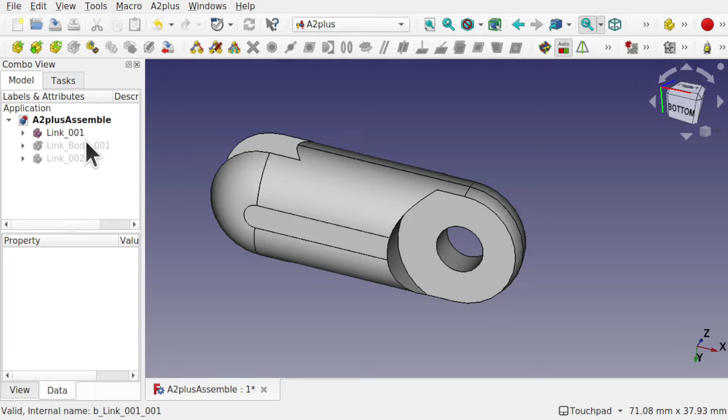In this tutorial we're going to be looking at the A2Plus workbench and the subject of printing in place, where we print an object that has connections but print it as one single object. For instance, we're going to take this simple link, model it, and attach it in the A2Plus workbench to a number of other links so they connect together through a hole and shaft. We can then simulate that in the A2Plus workbench to see the movement, and then print this on a 3D printer after slicing it to produce a movable part with that rod and hole. This will be the first video looking at the A2Plus workbench, and we'll go deeper to understand more about the constraints and the way objects link up.

So I hope you're enjoying these videos, and let's have a look at this workflow.

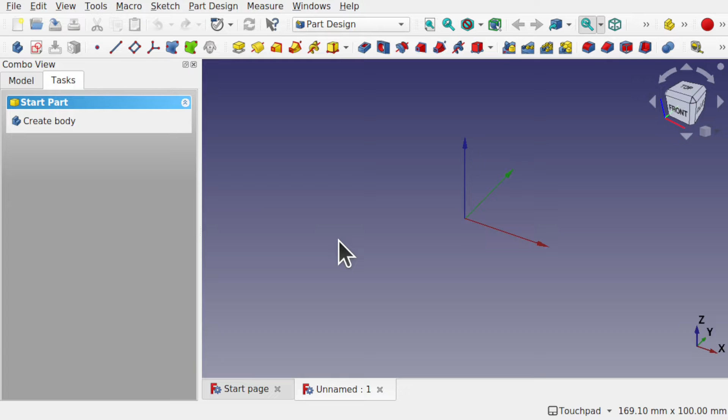I'm going to start by creating a new document, and in this tutorial we're going to be using Part Design. We can use Part if we want to, and what I'm going to do is create a simple link object. This object will connect with itself to make a chain of repeating objects that we can use to print in place with the A2Plus workbench. It's up to you what we create, but this is for demonstration purposes.

So I'm going to create a body and then create a sketch. We're going to go along the XY plane and hit OK. So this is going to be a very basic object.

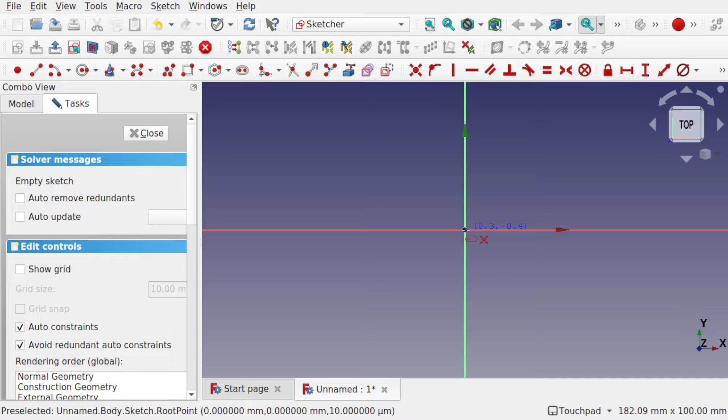I'm looking down on our scene and I'm going to create a slot. Just using the slot tool, I'm going to constrain to the center. You can see I've got auto constraints on. Then we can come up and place it connected to this line. I've got some redundant constraints because I've added it to that line, and also I had a horizontal constraint there which wasn't needed, so it's made it redundant.

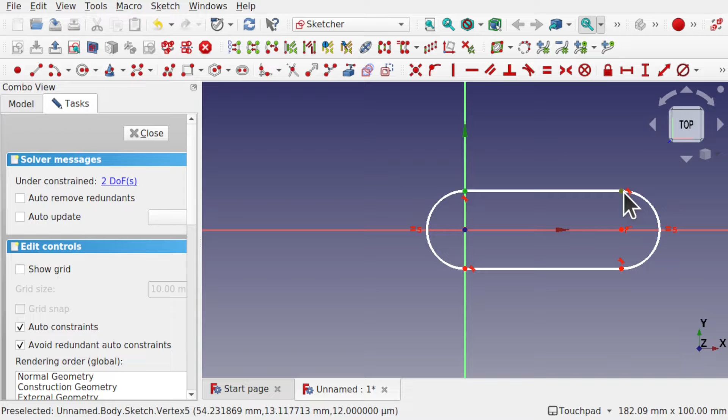Let's add some constraints in here. So I'm going to take these two points and make this 25 millimeters. Also going to add a diameter constraint to this arc, set this to 15 mil.

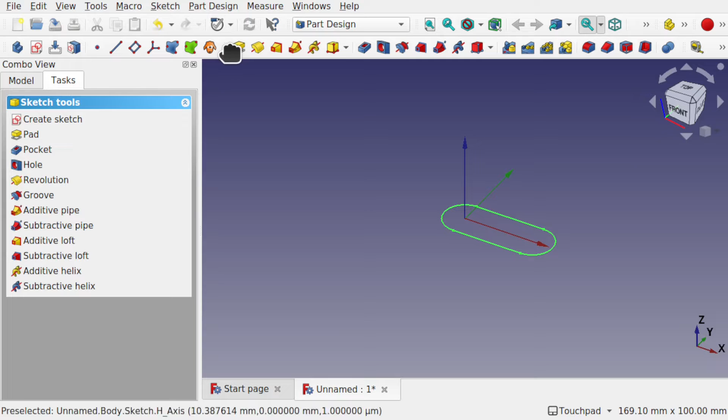Once we've got our shape, we can close and extrude this. In Part Design, it's known as a pad. So make sure the sketch is selected - you can see it selected over here - and we'll pad this. I'm going to pad this by 12 millimeters and also make the pad symmetrical to plane.

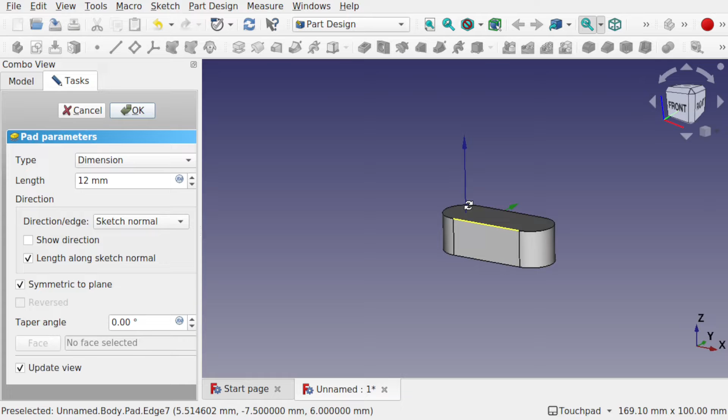This means if we turn the gridding on, you'll see this will be slicing through that plane. You can see we've got the axis cross on, and that's available from View, Toggle Axis Cross, and you can see that's in the middle of that axis cross. This just makes it a bit easier when I take a section out of here to make a slot, allowing these to be linked together.

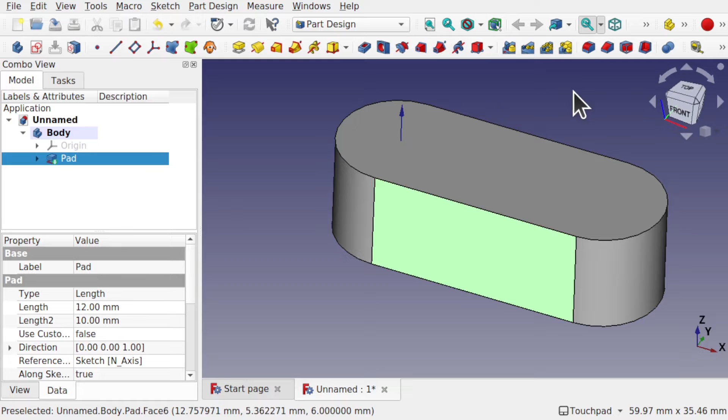Now, against best practices, I am actually going to fillet this straight away. The reason being is because I want the shape, and I know the fillet's not going to affect anything else. I'm going to click on this face and then create the fillet.

I'm going to set this fillet, pressing the up arrow on the radius, so it's just on the margin of error. At the moment 5mm - if I go one more, it goes into error, and you can see we've gone back to the normal pad. Let's bring this back down and set this to something like 5.99.

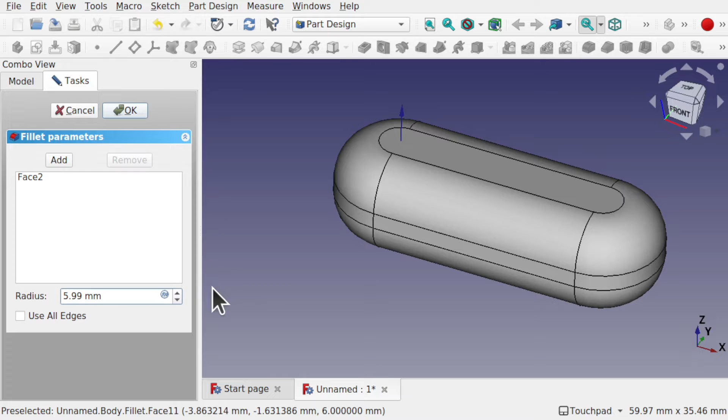That's allowed to take, hit OK. You can see that fillet has taken all the way around, because filleting this face will only succeed if all the other faces going around were filleted. So we've got this lozenge type shape here. If you wanted to, we could do this with something like a primitive object, like an ellipsoid or an oval, but I'm just going to use fillets for the time being because it's easier.

We haven't touched on primitive objects in our course as of yet. Let's create a sketch. This sketch is going to section through here, and we'll pocket this to make space.

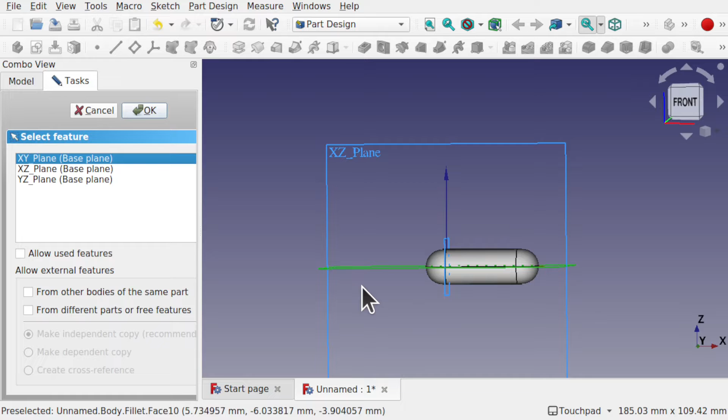Let's click on the top, make sure nothing's selected, and create a new sketch. You can go along the XY plane. If I add some angle to this, you'll see that the plane here, the XY plane, sections through the center of here. Let's hit OK.

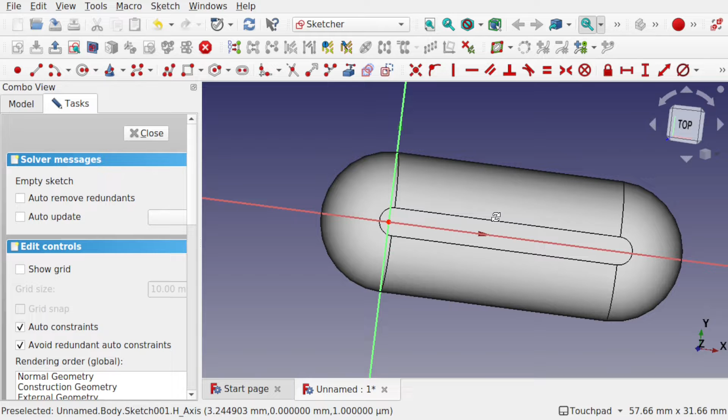We're now through the center of that object. Using the section view, or come up to Sketch, View Section, we'll cut this object in half. Use the navigation cube to make sure that we're around the right way, because if we start bringing this around, sometimes it becomes hard. If we say we're like this, it actually looks like the same as if this. We get this illusion. So always use your navigation cube to align yourself in 3D space.

Now we've got this shape. Let's create a circle in here and pocket it. Then we can create another operation on this side that will slot into this section when we repeat a number of links in our assembly.

Using the circle, make sure we auto constrain to that center point here. Got the auto constraints on. We get a coincident constraint, and we'll come out just beyond. I'm going to hit escape and click on this circle and add some dimensions. We're going to insert a diameter and set this to 16mm and hit OK. This allows us some gapping in here to allow for the connection to move freely in this space.

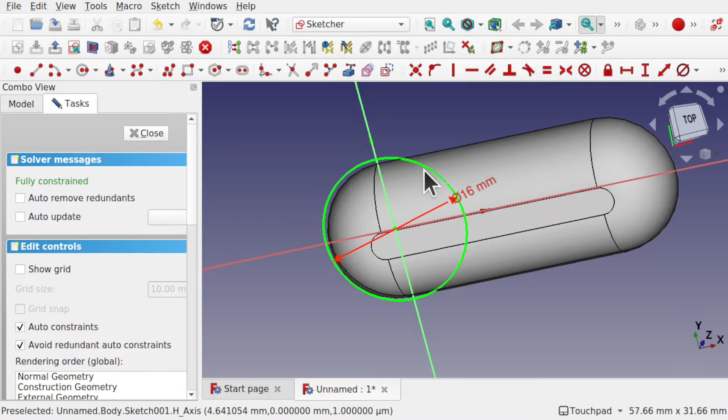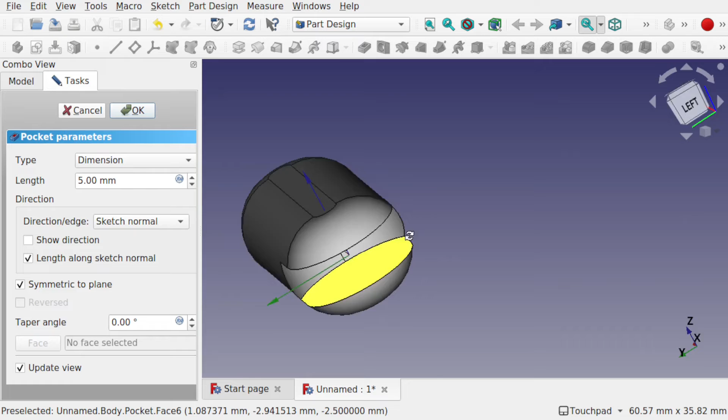Let's hit close. You can see the sketch is within there. Now we can use the pocket. This will create a pocket moving downwards. Let's make sure that the symmetrical to plane is selected, and we can see that pocket in there. And you can see the curvature we have. The length is 5mm. We can go for that. We can adjust that later and hit OK.

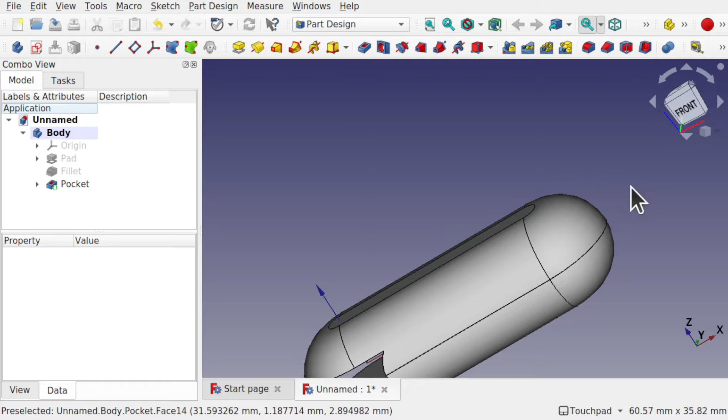Now we've got one side done. Let's do the other side. We're going to repeat this on the other side, but this time we're going to take material off this part and this part. So we get a female and male side.

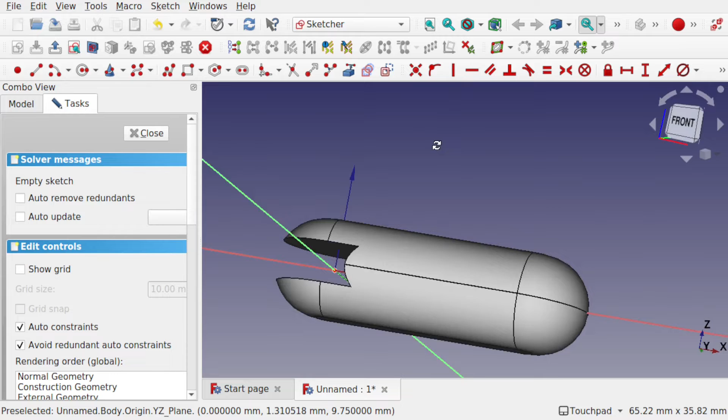Let's try that. Let's click on top, make sure nothing is selected, create a sketch. This time we're going to go along the XY plane again and hit OK. We are now positioned along that XY plane, and we can create another sketch. Use the section view. I'm going to import some geometry because we've got nothing to attach the circle to.

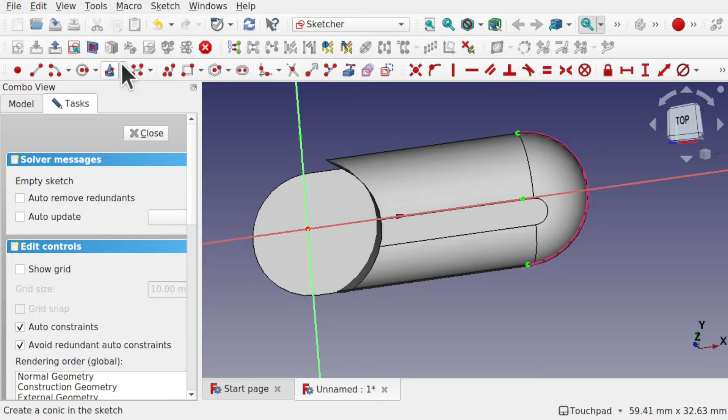So I need to take this geometry, import it, so I'll get a center point. To do that, I'm going to use this tool here, External Geometry, also available from Sketch, Sketch Geometries, External Geometry. If I highlight this edge here, you can see I can import it. Click on the edge, we get the center point. I can now use my circle and create a circle against that center point and bring this out.

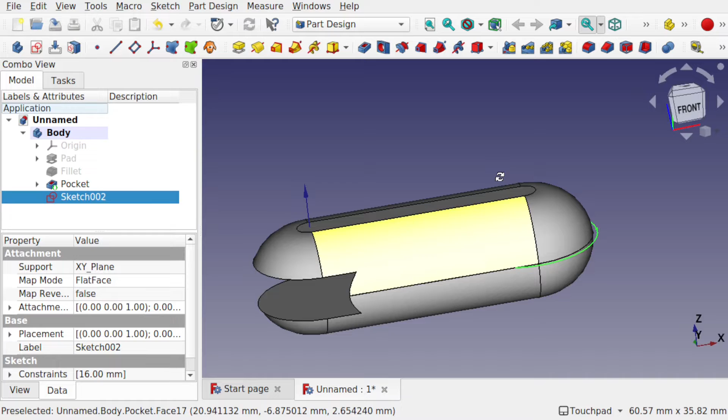Again, we're going to set this to 16mm. Click on the circle, add a diameter, and set this to 16. Hit enter. Let's hit close. We now have that sketch in there. I'm going to take that sketch and come out to edit and duplicate selection.

I'm going to uncheck the pocket, just leaving the sketch there. I'm going to uncheck the plane as well, we don't need that. And hit OK. We now got two sketches that are the same.

I'm going to move one sketch up and one sketch down. I'll click on the first sketch we created and move this up. This will be along the attachment and the position. We'll open up the position and move it along the Z axis. Now the idea is to move it so it's around about 2 millimeters away from the top here to allow for the print in place process.

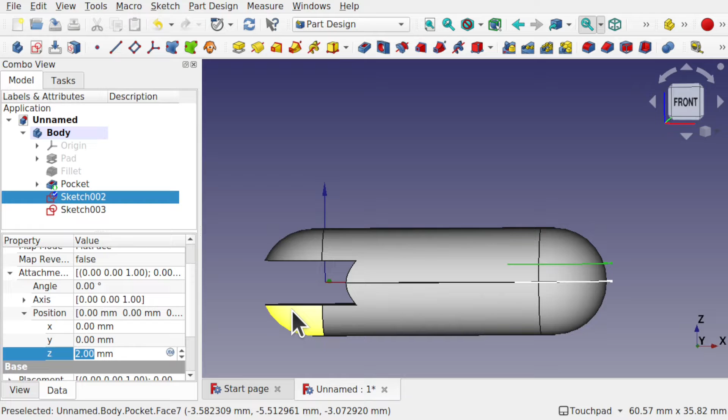You can play with the dimensions depending on the size of the extrusion nozzle you're using on the 3D printer, or to personal preference. So that's up 2 millimeters. Come into the other one, looking on the Z axis again, and we use -2 millimeters there. So we've got those two.

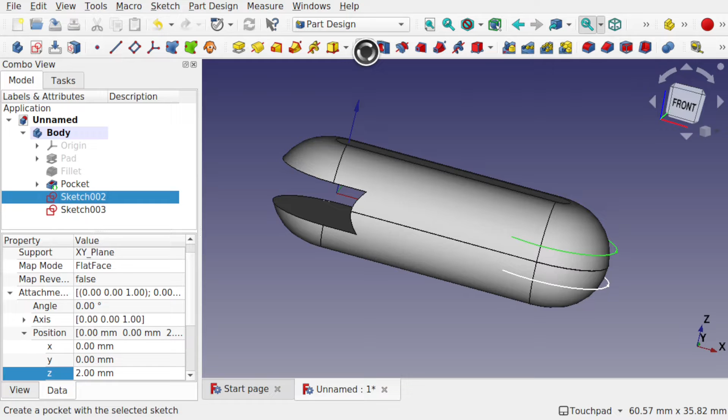We're now going to pocket these. Take our first sketch and use a pocket. Now this may go in the wrong direction, as you see here. Just click on reverse and we can set this to through all, which will go all the way through here, or to first. Yeah, okay, that's our first pocket done.

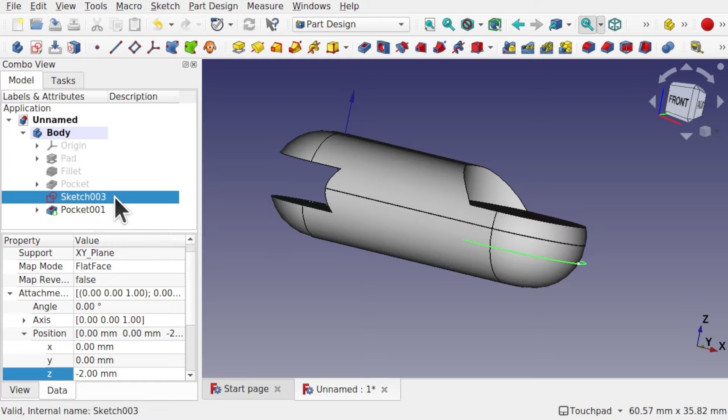Let's do the same with this one. So this sketch, let's pocket this using the pocket. This is going in the right way, so we can go through all or to first, either or, it doesn't matter. Let's hit OK.

And now we've got the starts of our model.

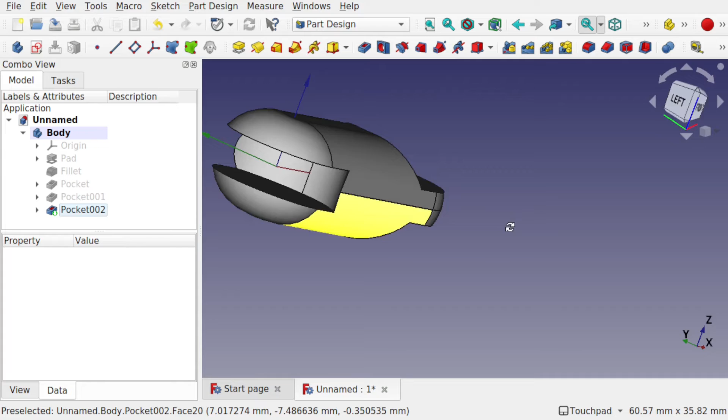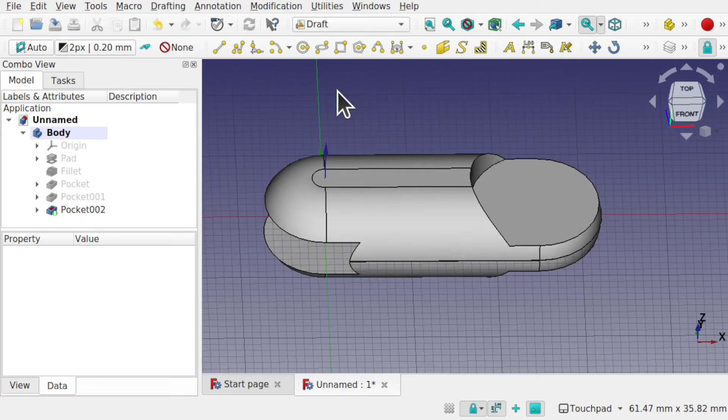I'm going to place a hole in this side. Now before we add the holes, let's get a quick overview of how this is going to join together. To do that, we're just going to mock up the assembly. So let's come into something like the draft workbench and make a clone. You can see the gridding is on and you can see how that's intersecting that plane there.

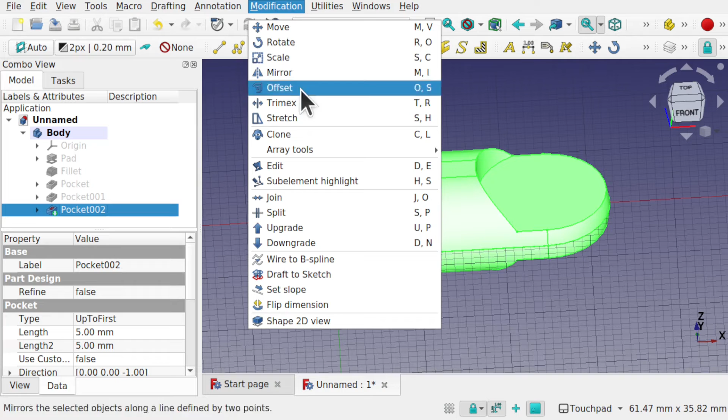Just going to make a simple clone of this, clicking on the body and using the clone. We could have done this in the part design, it doesn't matter, but one other thing we can do, rather than clicking on the body, we can click on the last action and clone that. So come up to modification and clone. This creates a simple clone of that pocket.

And you can see a clone there, which I can right click and transform, and I can move this over and get an idea of how this is going to look. So we can see how that fits in there.

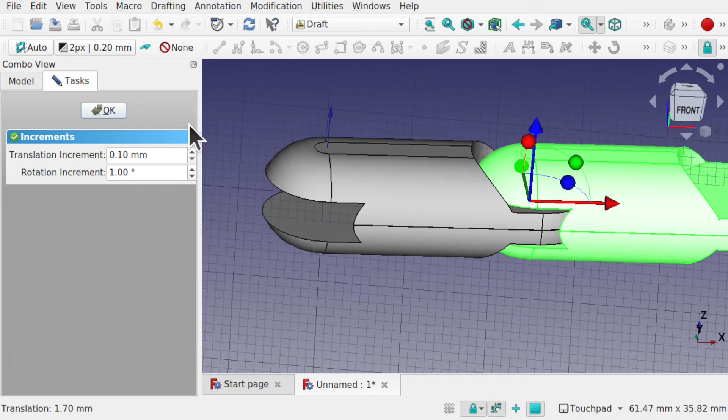Let's hit OK and add some transparency to the clone by clicking on that clone pocket, coming down to the view, moving down to the transparency and raising it up to something like 80. This allows us to see inside, so you can see how that's inside there.

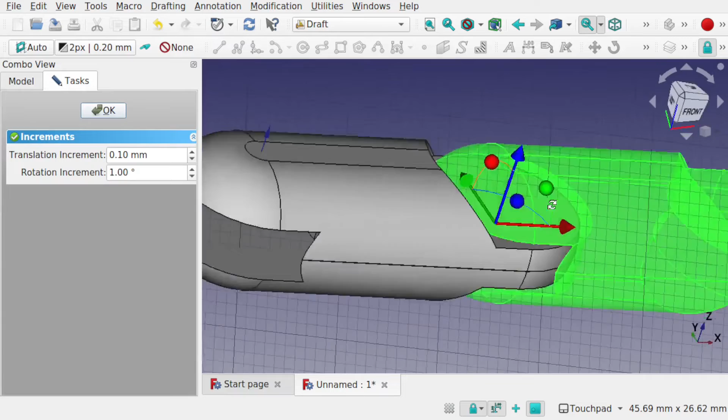You can see we've got clearance, and if I transform that a bit more, right click, transform, we can get an idea of where this has to be to allow for the hole. So we can see that sitting in there. And we just get an idea of what it's going to look like and how they're going to connect together.

Let's now create the hole. I'm going to keep the clone. I'm going to hit OK. And before I exit the draft workbench, I'm just going to turn the gridding off by this tool down here. Let's go back to the part design.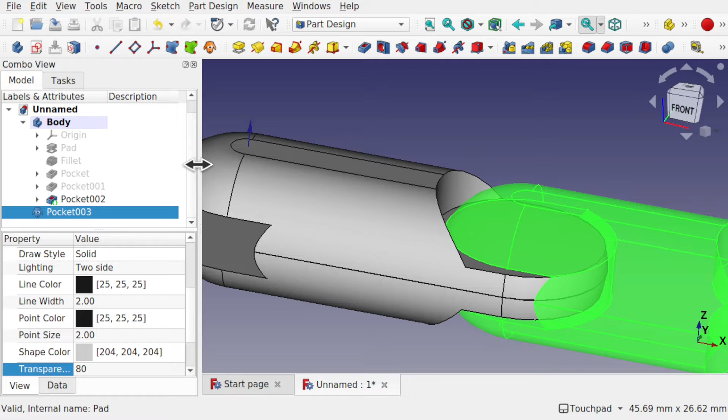Now we're back in the part design, and I can hide this clone and come in and create a sketch upon here. Let's click on this face and create a new sketch. We've attached the sketch to here.

Now we've got to pull in some geometry because I want the center point. So let's try pulling in geometry from here. You can see we've pulled in a B-spline. This is no good to us because it doesn't have the center point.

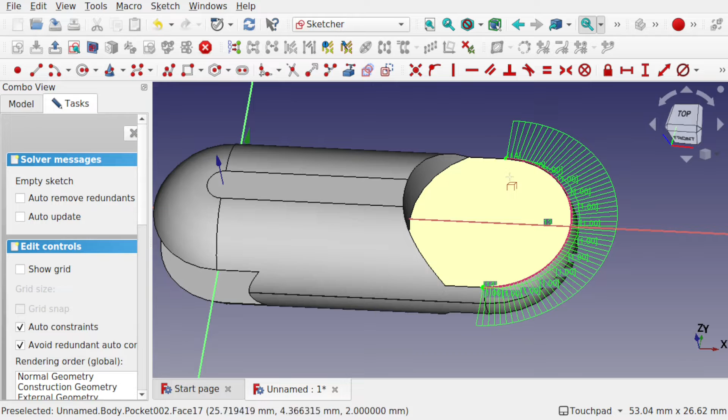To remove that, let's come over to the tasks and scroll down to find that B-spline under the elements. You can see we've got purple dots, this means it's an external reference. And we can see that by dropping down the drop down here to external, and that doesn't change. So construction, external, or all, you can see this one is external.

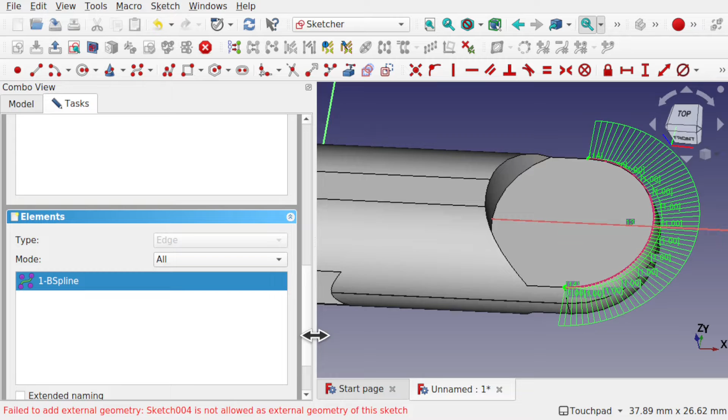Let's come over, hit escape to get the mouse pointer back, or hit the right mouse button and highlight that edge and hit the delete key. Let's remove that now. Now, one way to find that center in there from the geometry we've already placed is to use the original sketch.

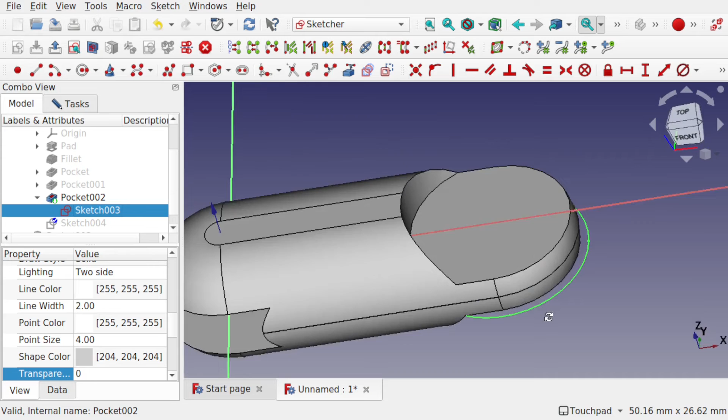So come over to the model and find that last action, which is this pocket here, and come in and find this sketch and press the space bar. We can see we got one of the circles that's built this feature, and we can use the import geometry against that circle. Let's do that and bring that in.

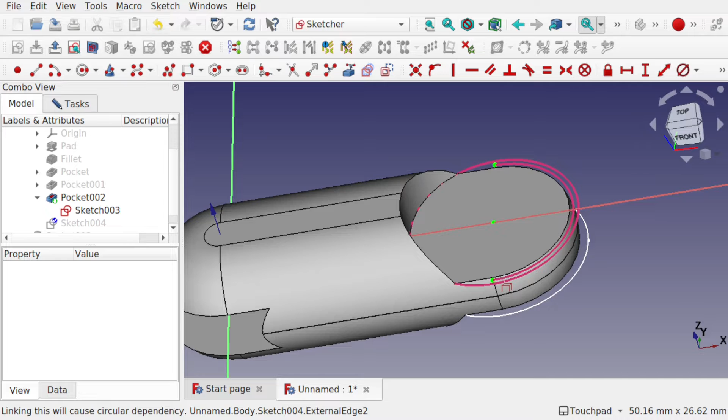We've brought in that circle. We could have also used this circle here, or brought that in as well. So we've got a choice—this edge or one of the circle sketches. We don't need both, so I'm going to go for this edge here. Let's hit delete on that circle.

Just showing you the options we have if you can't find standard geometry and you keep getting B-splines. The B-splines appear because we've removed a pocket from here and we're no longer left with a standard arc geometry that describes that pocket.

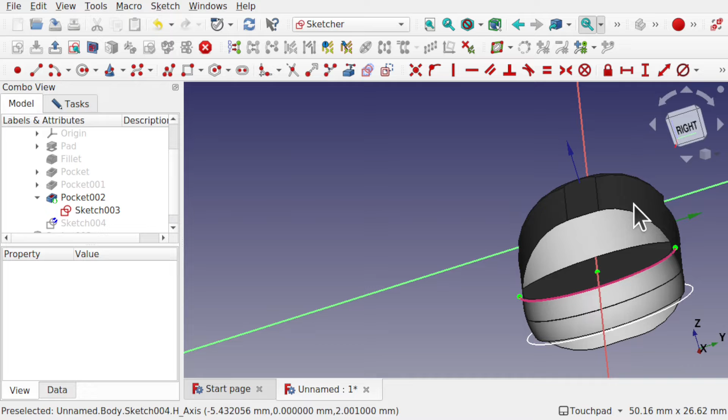This is especially common when you have curved features like this. We've filleted this and we have this curvature, because if we come around this way, we can see when we pocket, we have different widths of pocketing running down here. So this will be described as a B-spline if we pulled in the geometry.

I'm just going to hide this sketch here, clicking on that sketch and pressing the space bar, and we're going to start adding the hole. Using the create a circle tool, I'm going to add a hole in here.

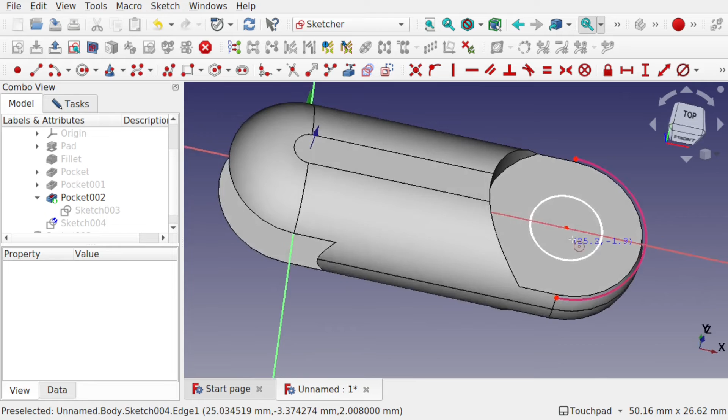I'm going to create this quite big to allow for this link to move freely in here. I'll hit escape, click on this circle, and add some diameter—I'm going to set this one to 6mm. Come over to task, scroll up, and hit close. We've got our sketch in here.

We can now click on that sketch and use the pocket. I'm going to set it to first and hit OK.

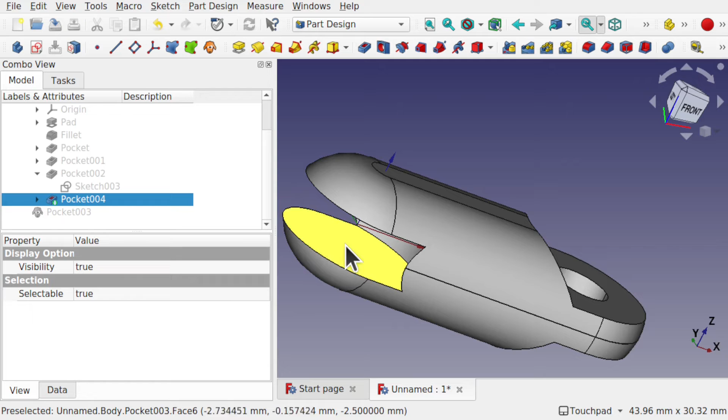We've got our hole. Now let's create a shaft that will actually go through this hole to connect up. I'm going to click on this face inside and create a sketch.

Let's use the section view. So now we're going to add the shaft that goes through the hole. We're going to use a circle and auto constrain to this center point, like so, and come out and create a circle.

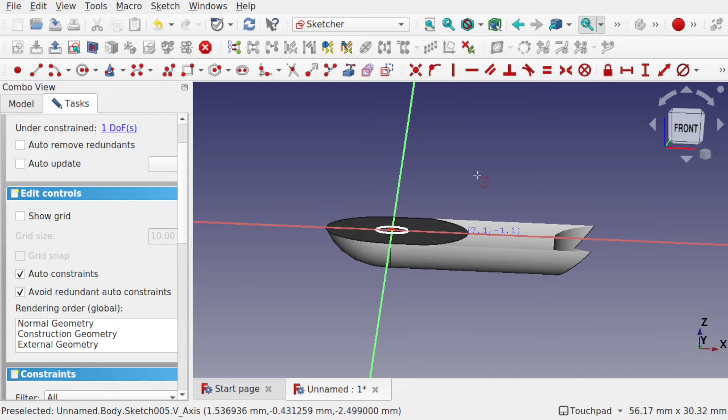Now if we look at this without the section view, we can see what's starting to happen. When the shaft goes in here and we create the assembly, they should all link together. When I pad this, we'll be able to see this in the actual draft as well—that draft clone, we'll be able to see that in there.

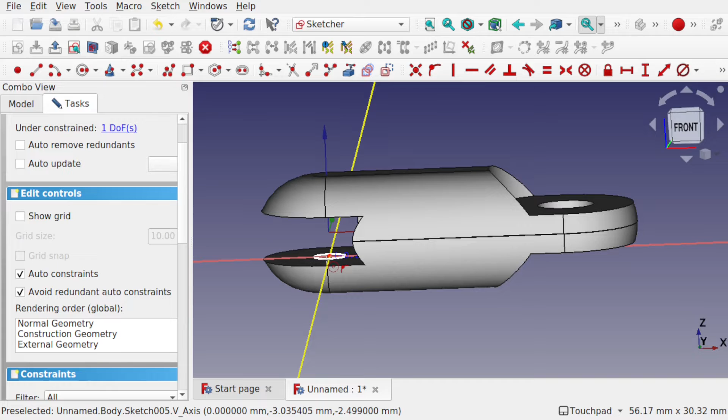That adds some dimensions, so we've got this circle here. Let's hit escape or the right mouse button to get the pointer back, click on the circle, and add a diameter. This diameter is 6, so we're going to go for something like 4, and hit OK. Let's come out and hit close.

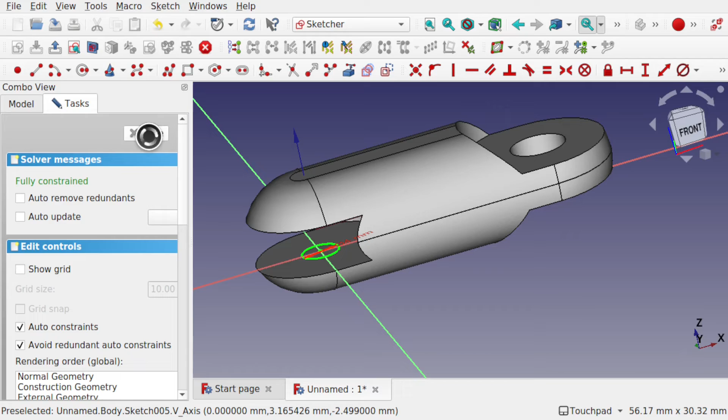We've got this circle here, and we've got the sketch selected. We need to pad, and we need to come up to the first face.

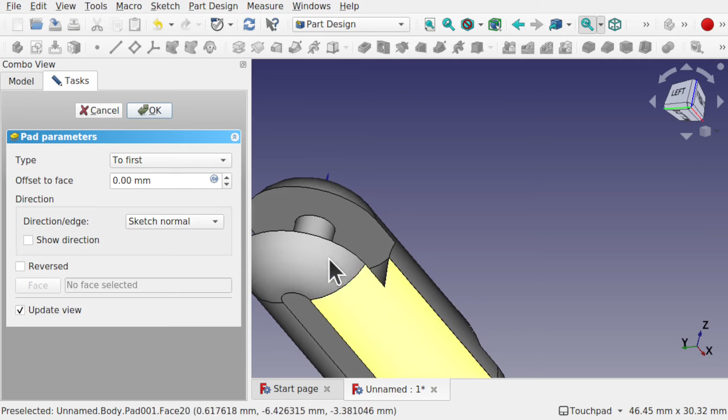At the moment it's gone all the way through, so use the type dropdown, bring this down, and click on to first. That means this is padded up to that first face there. If we hit OK, we've got our finished link.

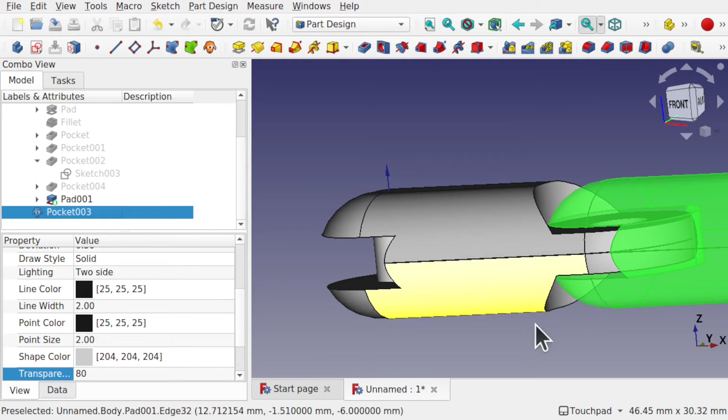Now let's have a look to see what's happened with the clone. We come down, we can see our clone is still here. If I press the space bar to make it visible, we can see what's starting to happen now. Let's click off.

So we've got our clone, which was just the clone of that pocket. Now if we cloned the body, it would have taken the clone of all of this body. So we can use a clone at different stages, or we could just clone the body as a whole.

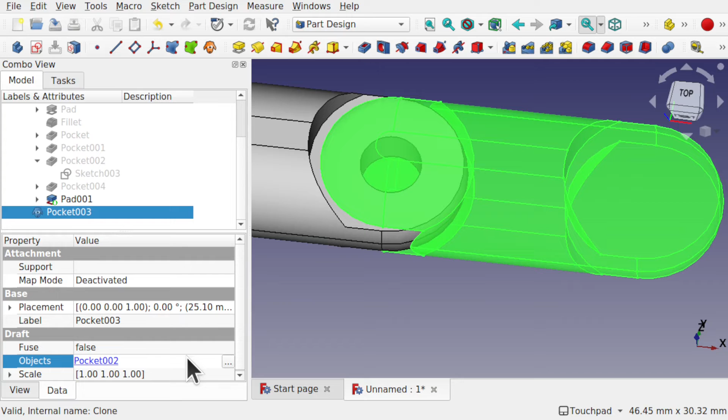Let's see if we can change that clone. Let's come down and have a look at that cloned pocket, and use the data. If we come down, we can see the draft and the objects—we've got pocket 002. We can change this by clicking on that field, clicking the button, hitting clear, and then selecting whatever we want from the list. I could select the body, or the last action, denoted by the little green arrow as the tip.

So we can select that pad from here, or select the pad from the list, and hit OK. If I click off, everything recomputes, and you can see that our hole has now got the rod going through it, and everything looks okay. We can now use this in assembly.

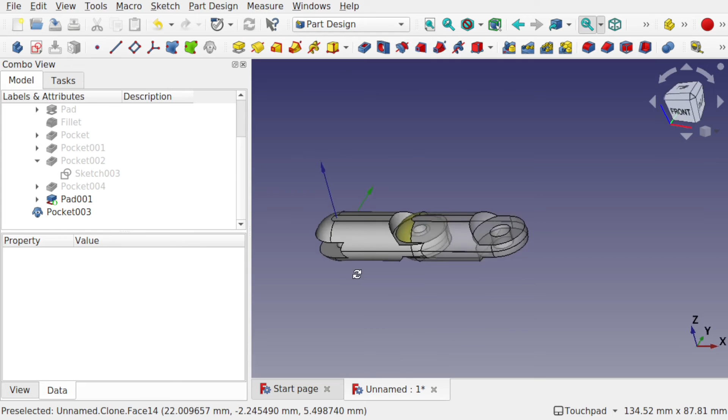I'm going to get rid of this pocket, this cloned pocket, and hit delete. So I don't need that now.

I'm going to hit File and Save As, and create a new folder. In here, I'm going to name this just as A2Plus demo. I'm going to save everything into this folder. Let's open up the folder and save this, say as something like link. Hit save. That's our first model created.

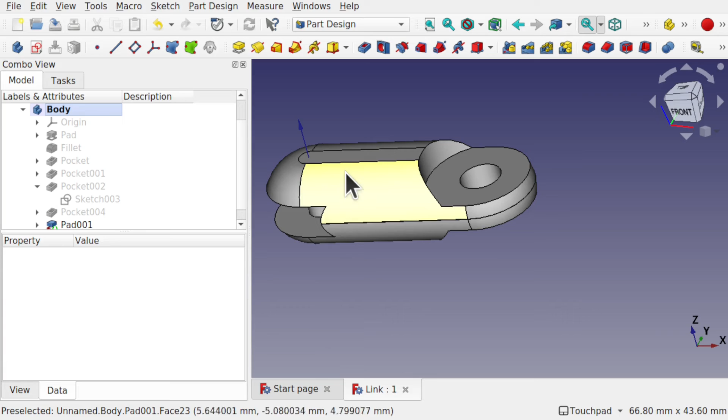So we're going to use repeats of this model in our assembly. So let's start with the assembly. So now we're going to create the assembly.

I'm going to close that link and start a new document. And straight away I'm going to save it. So File, Save As, and we're inside that A2Plus demo. And I'm just going to call it something like A2Plus Assemble. So now we've got our document ready to go.

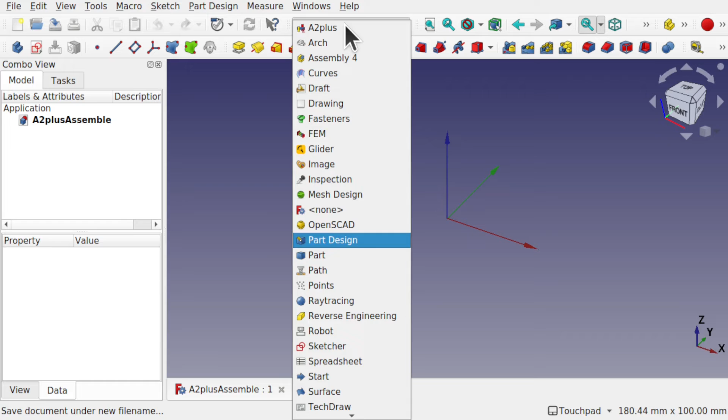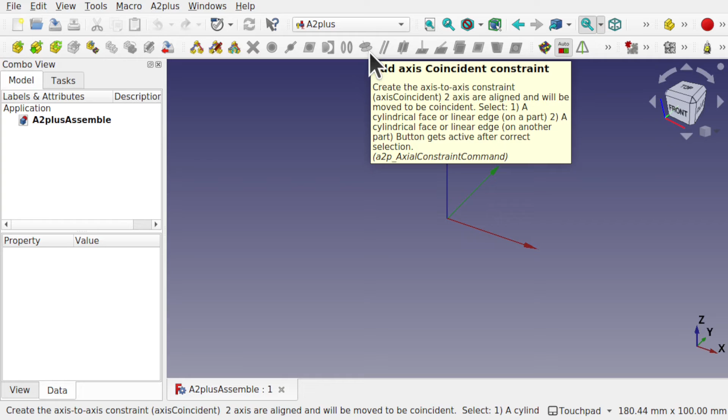Let's come over to the A2Plus Workbench. So the A2Plus Workbench is actually quite easy to use. It's a much simpler approach, and it requires less setting up. If we look along the top here, we have a number of constraints, and these allow you to take, say, an edge, a face, etc., and connect those together. So we can import one model and connect parts of that model to another model, or something that we've created in another workbench within the same assembly.

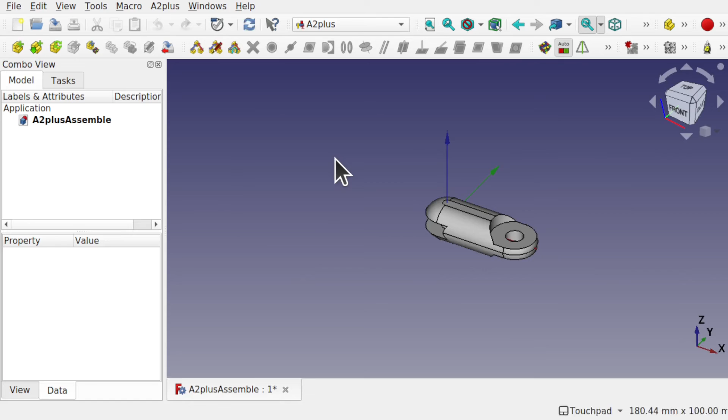Let's first import our link. We can use the tool Add Shape from External File found on the toolbar, or we can come up to the A2Plus menu and come down to Add a Part from External File. Click on that and choose our link file that we just created. Double click it, and we've got our first model in our assembly.

I've got nothing to attach this to. We'll click on that link 001 and come down. You can see that the first item that's imported has a fixed position of true. Now this is important when we come to such things as simulations. There's a very basic simulation system in here, and we're going to be showing that off in a moment.

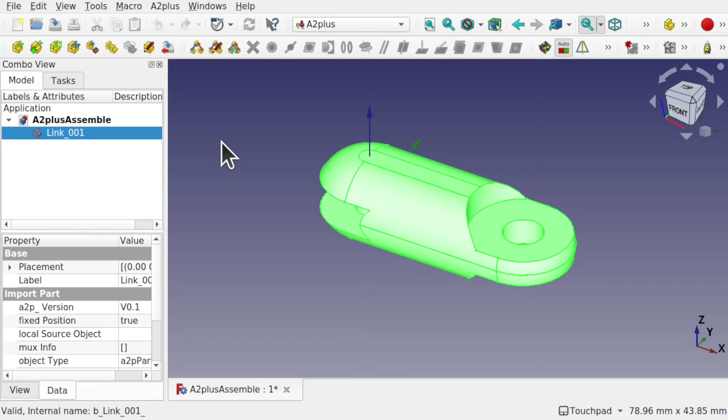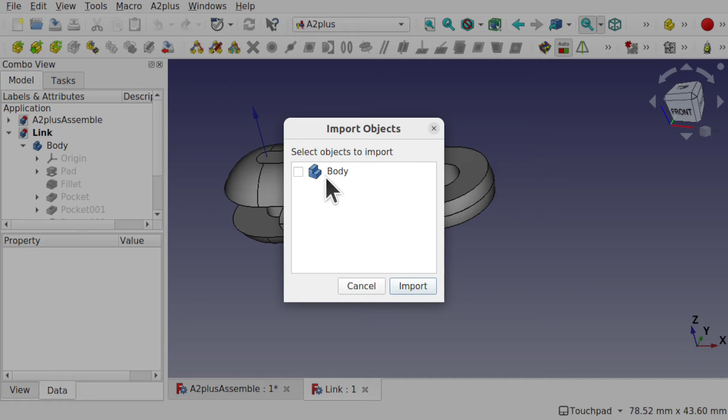Let's import another link. Make sure nothing's selected. Come up to A2Plus and choose Add a Part from External File, or use the toolbar, and we'll click on that link file again. It's going to ask what to import. So we've got multiple bodies in here. We can actually select multiple bodies. We've only got one, so select that and import it.

Now, as we move the mouse, the new model will come available, and we can drop it wherever we want. So let's just drop it into the spare space over here, quite close to this link.

We can move this by using the Move a Selected Part tool, or we can just right click and transform, and move that somewhere and hit OK. By clicking on it and using the Move a Selected Part, then we get the same transform option there. Let's hit OK. I'm going to now attach this part to this one.

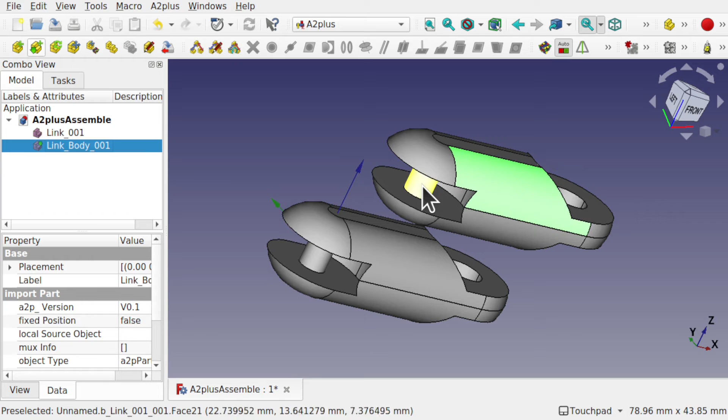So we're going to chain them together. We want to use this shaft and this hole. Now the two things in common with this are the circle edges.

So we take the circular edge from one here by selecting that edge, come over to the other one, hold down Control and select a corresponding edge. Now if I select this one, they will be lined up. So if I look to see where this one should fall, it should be really this top edge here. So this circle here, this top circle. Hold down Control, click that one. We've got the two circles selected.

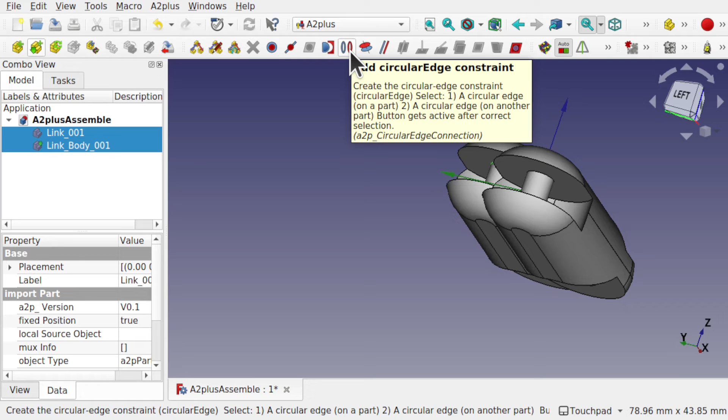If we come up here, we can see all the constraints are now available. I'm going to use the Add Circular Edge constraint because we've added two circular edges. Click on that. They will be joined together, like so. You can see that we've got that edge buttoning up right close to the top here.

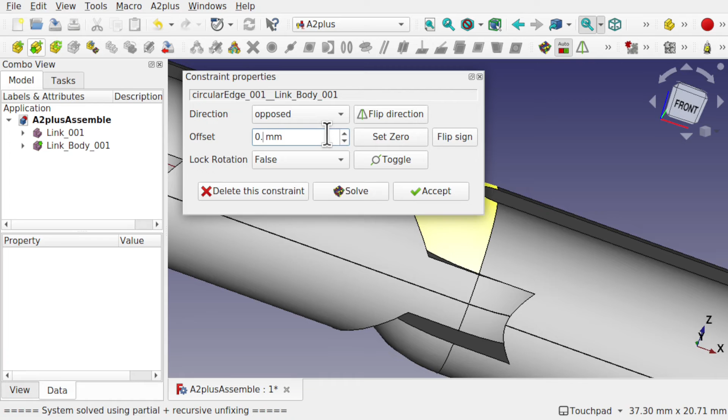Now if you come over to the left, we've got some offset here, so we can lower that down. And if we use the up and down arrows, it's in millimeters, so I'm going to actually type in 0.5, and we use minus 0.5. That places it in the center there. And we've got clearance from both sides. If this is around the wrong way, we can use the flip direction here as well. So we can flip it around.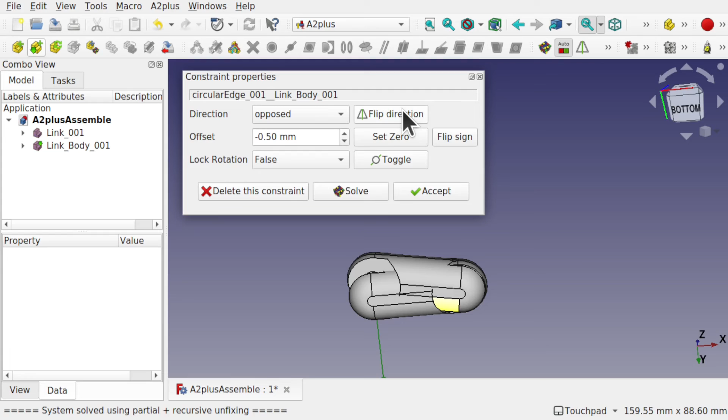I'm happy with where that's positioned, and I hit accept.

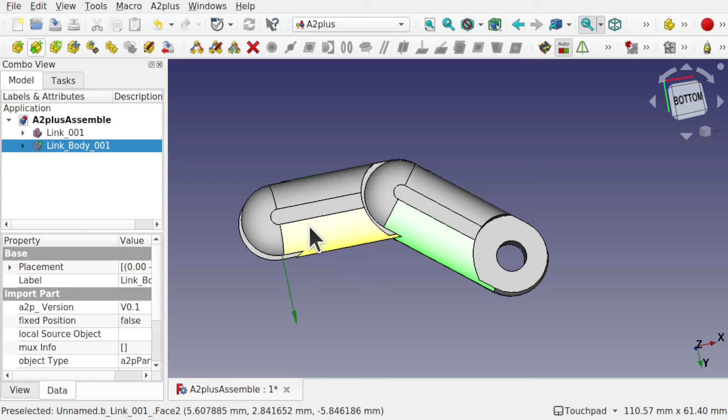Now that's positioned. If I click on this one and look at this link body, we can see the fixed position is false. So we've connected this to a fixed object, this one, and this one is false.

This allows for simulation. So if I try to move this now, it won't move. If I click on move the selected part under constraints and try to move this, it's not going to move. We need another one in our chain.

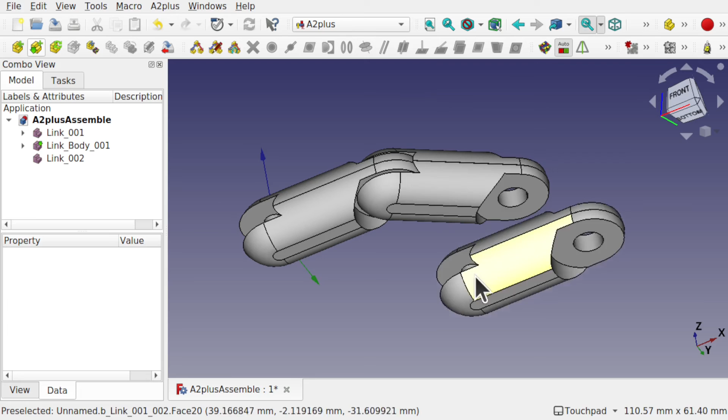So let's add another one. Come up to A2Plus, add a part from external file, then click the link again and hit open. Move the mouse, our link appears, and we're going to go through the same process.

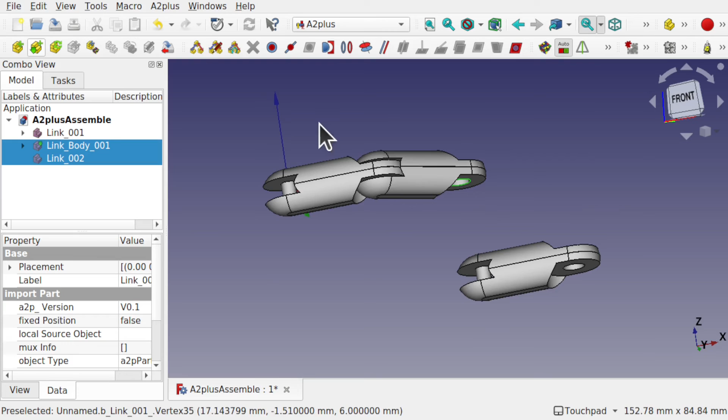Click to drop, come in, and we'll select the circle, that edge there, and the circle that it's going to connect to, this one here, control select. Now click on the circular edge constraint, and we need some offset.

So we can see that's gone in there. That's set the offset to minus 0.5. So we've added that link in there.

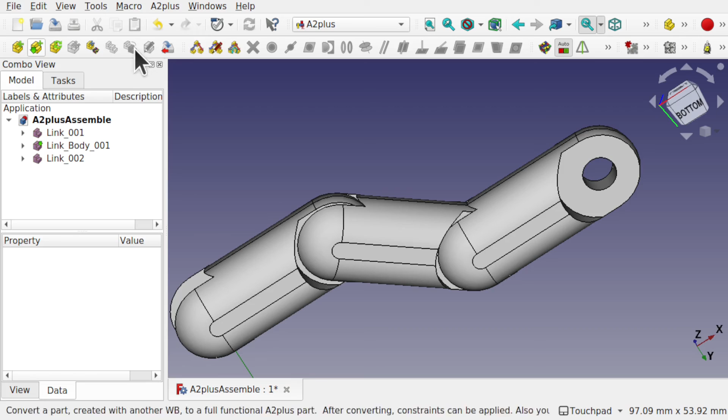Accept that. Now when we move this link by using this tool here, the move selected part under constraint, click, and you can see we have some movement in our model.

So we can see how this is going to move when we actually print it, so when it's all connected together. And you can see that we can actually go into the body.

So there is no physics involved in this. This is just solving the connection, so you couldn't use this for something like gear teeth or anything like that. It's just a basic solver, but it gives you an idea of how this will move under constraint.

Let's just click to drop this, and we're back to where we started. Make sure we save. What I'm going to do now is export out this whole assembly.

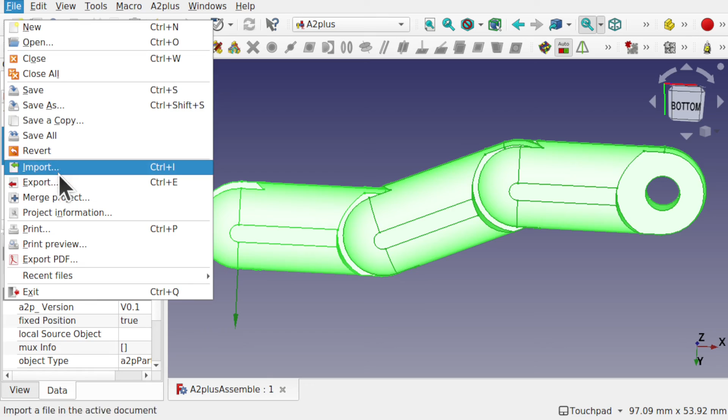To do that, I'm going to control click all the links in here and use the file export, and I can export it out as an STL file, an object file, etc., a step file if I wanted to. I'm just going to go for the standard STL file and save this off.

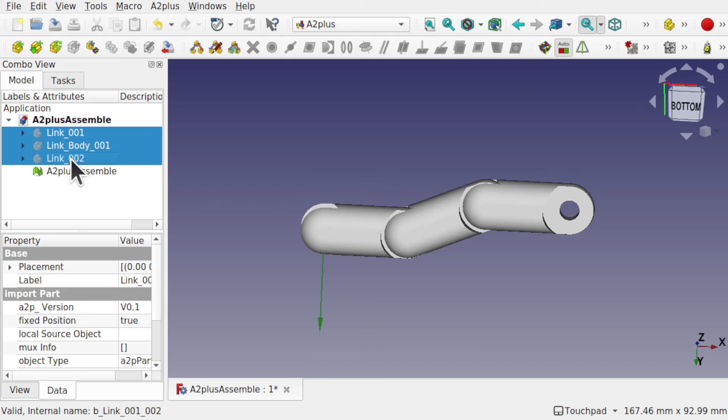So what I've actually saved, I come to File, Import, and pick that STL file, hide the links by highlighting them all and pressing the spacebar. We can see we've got our model in there, and that is ready to print.

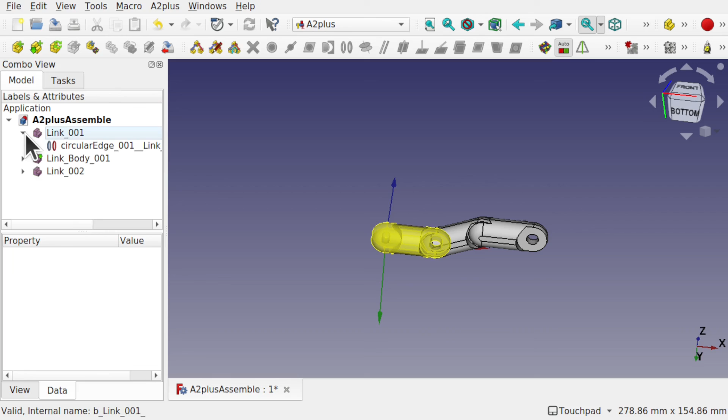All I'm going to do is just delete this before I print it and just show you some other things in here. So I'm going to just press the spacebar on these to bring them back. If we come into our tree and open these up, you'll see the constraints within.

So we've got all these constraints here, and it also shows where they link to. So if I click one, come up to A2Plus, view, and highlight both constrained parts, click on that, we can see where those two are constrained.

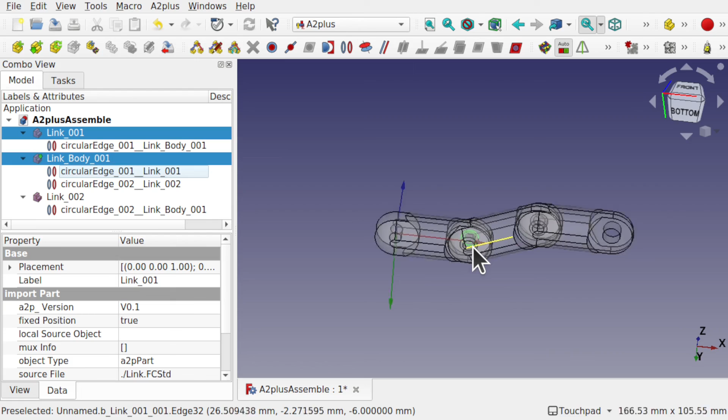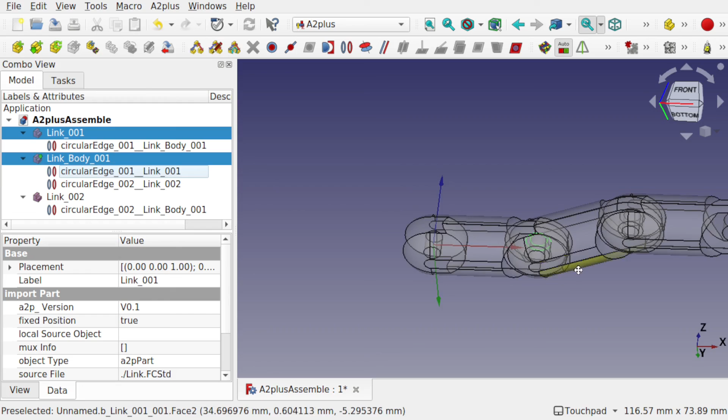So you can see the link body there and link 001 here. It shows how those are constrained and where they're constrained. We can see that green circles in there showing where we added the constraint. This is really handy to figure out, if we get stuck, what parts are constrained to where.

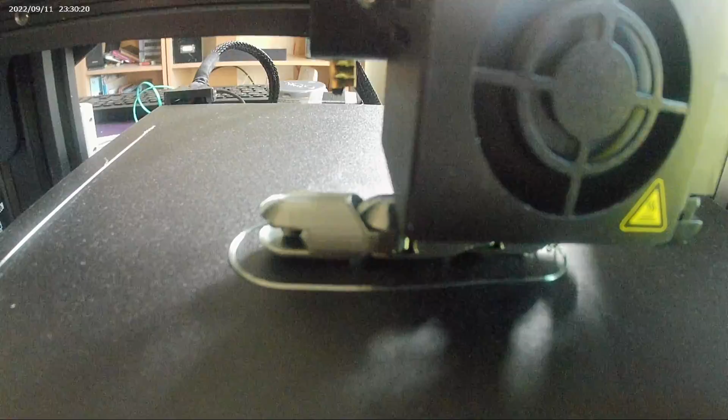These other constraints I will go into in another tutorial. So this is just a basic tutorial of how to constrain these simple parts together and how to do a 3D print in place. Let's slice and print that STL and see the results.